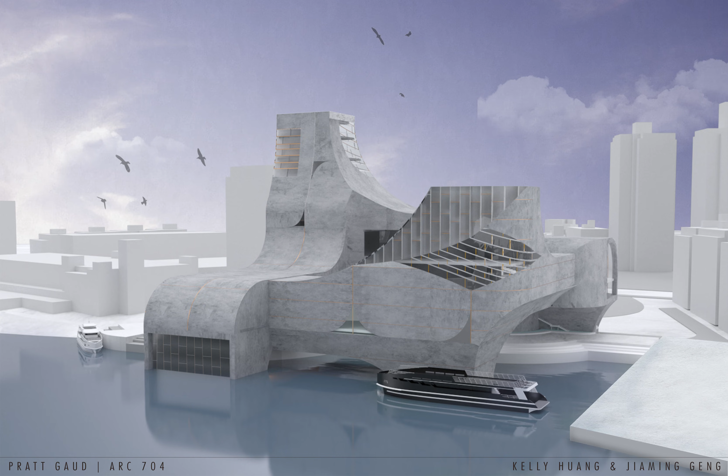The building mass is lifted off the ground to create public space and access for the community, carving away the existing ground and extending the building into the water for better views and functionality. A central courtyard is not only to allow more light and air into the building, but also the place where all the three programs, Waste to Energy, Recycling Center, Nightclub, overlap and intersect.

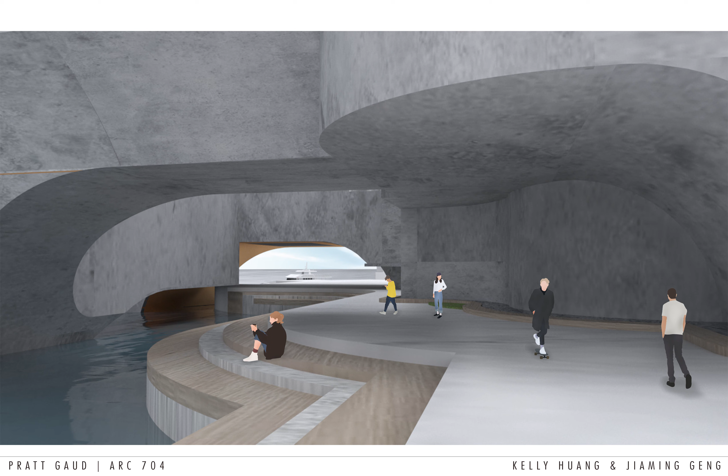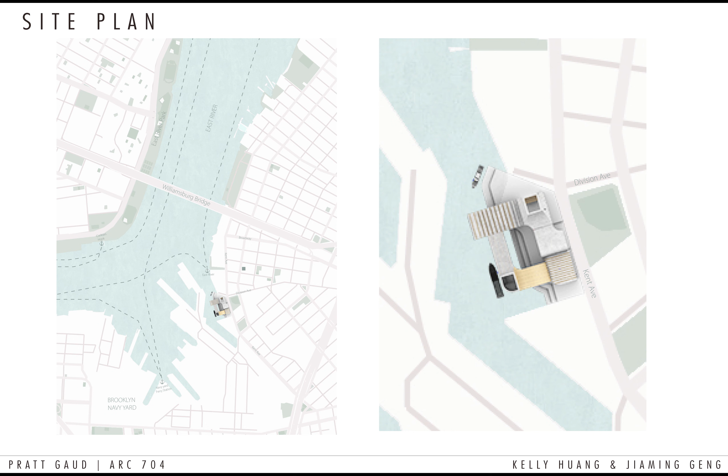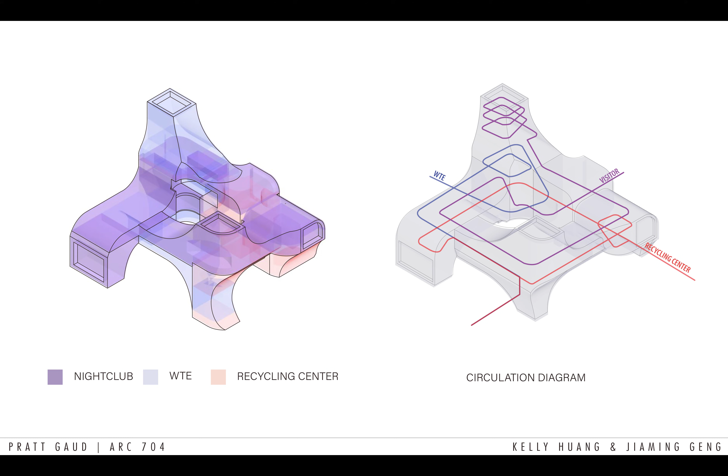The Waste to Energy and Recycling Center is mainly on the street side, but also goes under and in between space of the nightclub, and it leads all the way to the water side for the barge. The nightclub is invaded into the in-between space around the machine. There are no clear boundaries between the three programs.

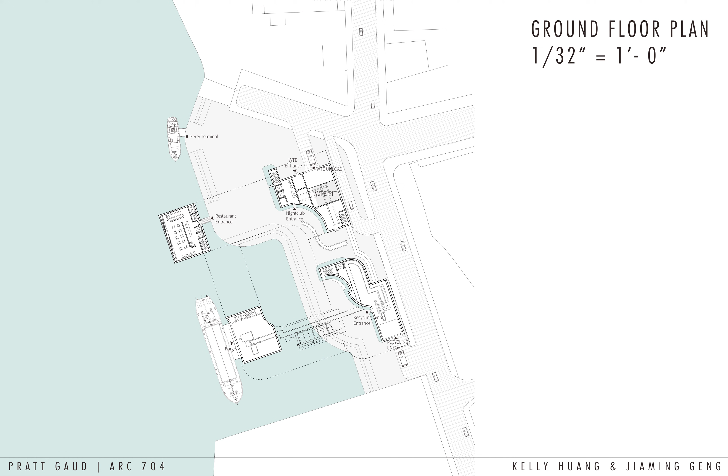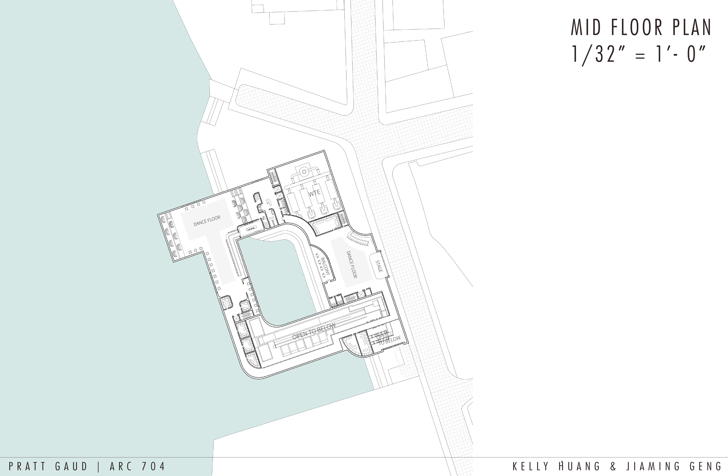On the mid-floor plan, there are two large dance floor areas, with one featuring a stage for concert or live band. As the visitors come from the elevator, they will arrive on the first dance floor area with seating and bar along the sides. And as the visitors circulate through, they will find several karaoke rooms that are located on top of the recycling space. The glass walls of the long corridor would allow visitors to see the machinery while enjoying the nightclub.

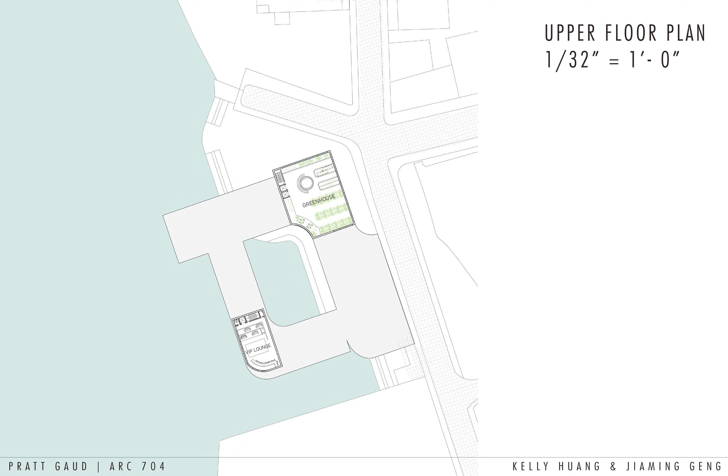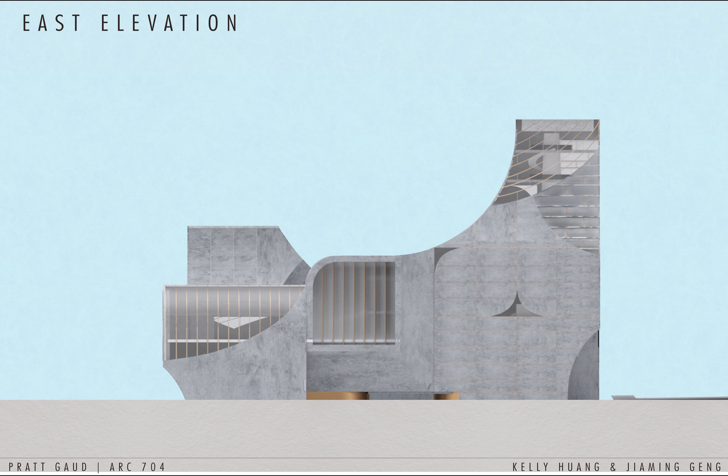For our elevation, we use the translucent and transparent glass for the openings, and we use the GFRC as most of our curtain wall systems. The size is about 8 by 15 feet. And on the east elevation, there are some flared edges on the curtain wall. These small openings are also part of our windows because the factory is in this part, so we use the translucent glass for most of our east facade openings.

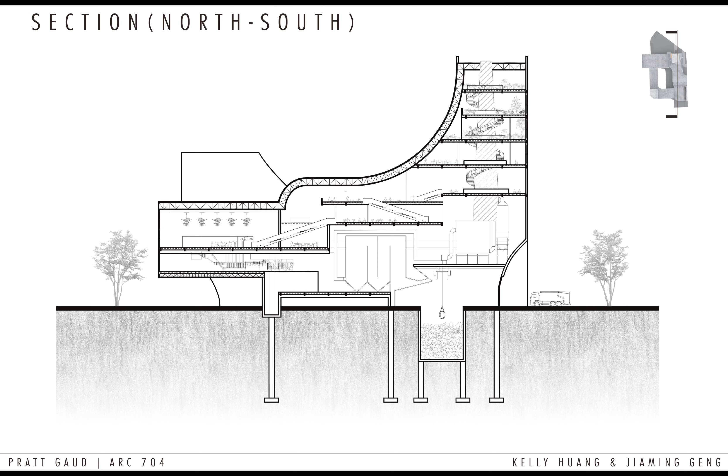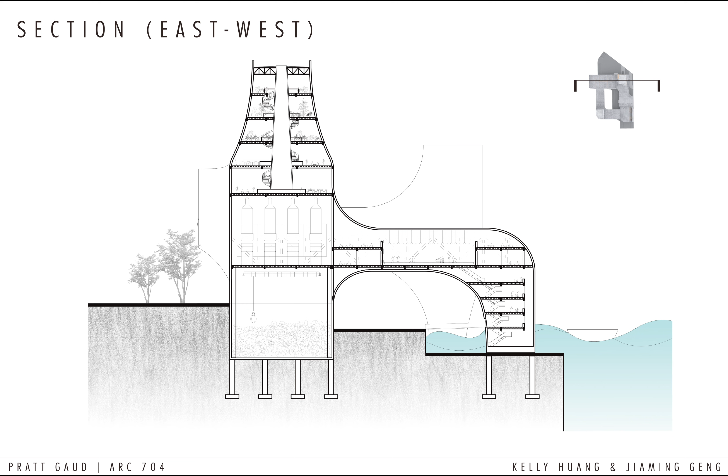People can see the view of Manhattan here. There is a bridge on the ground to connect the restaurant, and people can take a ferry to here. They don't need to go through the factory and the nightclub.

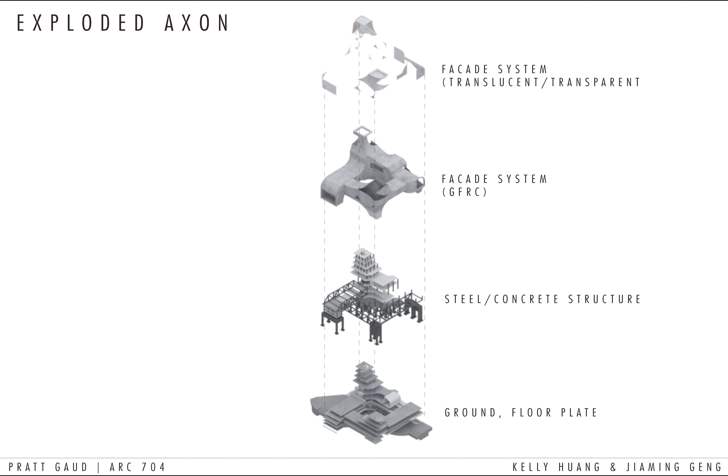Then we move to our exploded axon. The outer layer is our glass curtain wall system and the GFRC system. The inner is a steel and concrete structure. In the nightclub, we use a large truss system due to the large span. It's about 2 to 3 floors high. For the floor plate, we used a concrete slab. The foundation is inserted directly into the ground and the riverbed.

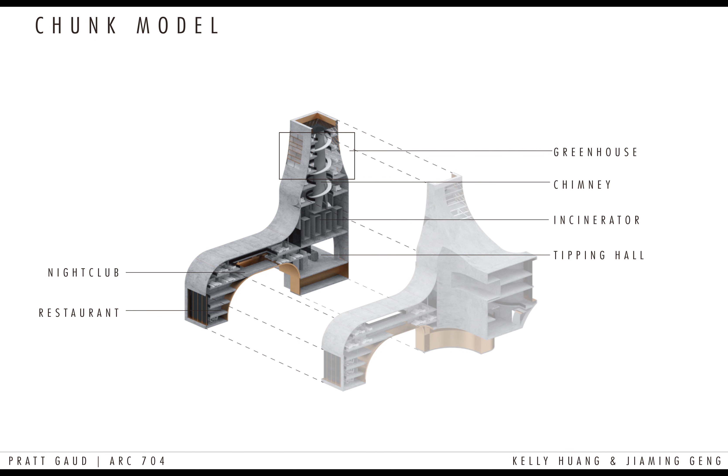Here is our chunk model. We chose the part which has the intersection of the waste-to-energy and the nightclub. The underground is a tipping hall, and the incineration chimney is set above the tipping hall. The double high space is for the staff and the visitors to see the process of the factory. There is a stair spiraling up to the chimney.

The space near the chimney is used for the office and the greenhouse. The left part is supported by the large truss. Here is the dancing stage of the nightclub. The truck comes from a truck entrance and leaves the same way after dumping the garbage.

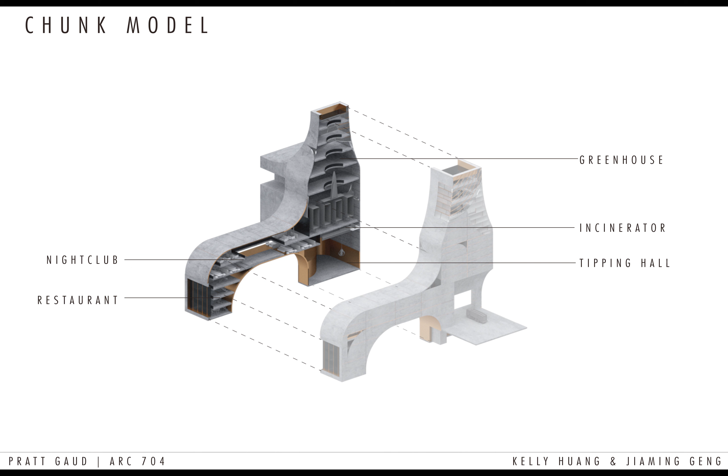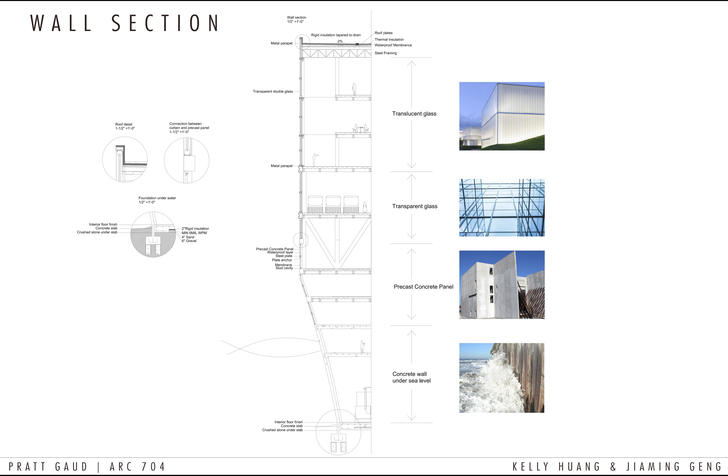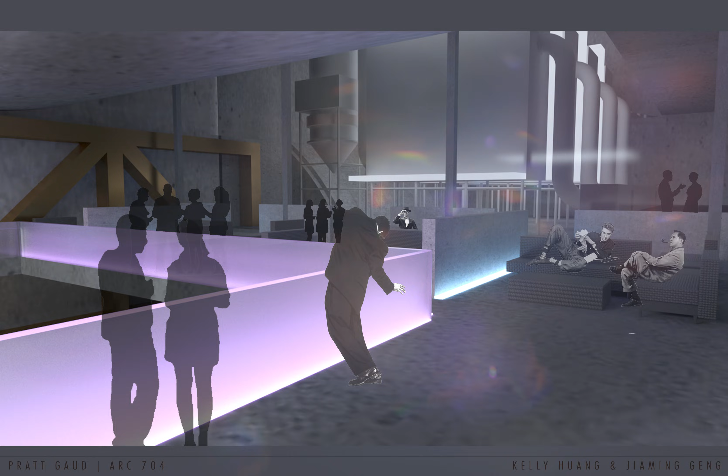During the nighttime, visitors can enjoy the club while seeing the machinery behind the glass wall. The glass facade of the nightclub space will allow the colorful light of the nightclub to shine through.